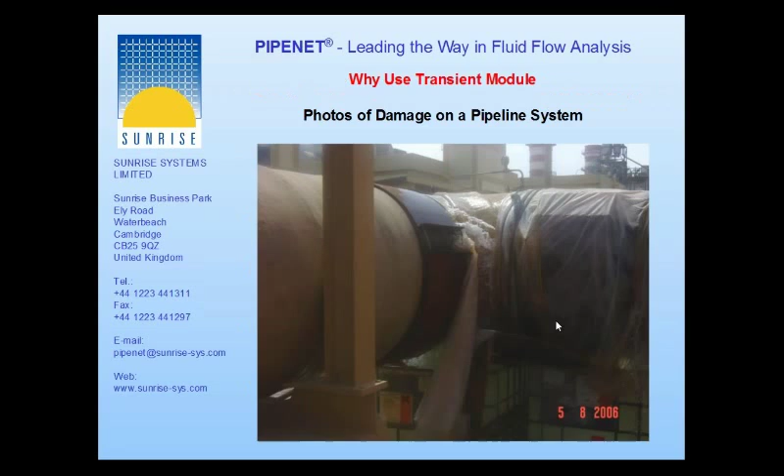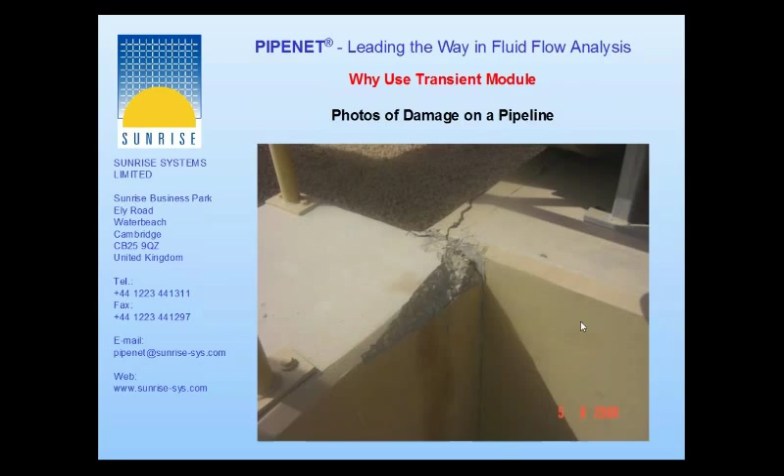I would like to show you the picture of damage on a pipeline system that is due to pressure surge. It is cracked because of the force from the hydraulic transients. PIPENET has 3 modules: standard, transient, and spray sprinkler module. The spray sprinkler module is for design of fire protection systems. In particular, it complies with NFPA rules and with some other rules as well, but the most important one is NFPA rules.

The transient module is used for dynamic analysis and it is for many kinds of applications. It is used, for example, for cooling water systems, loading and unloading systems, water injection systems, subsea and cross-country pipelines, steam hammer, and modeling control systems. All these applications are used for calculating the pressure surge. And as you know, for pipe stress analysis, PIPENET needs to calculate the hydraulic transient forces. Programs like Caesar II and ROHR2 can automatically read this kind of information from PIPENET. The other very important aspect of PIPENET is the ability to model the control system.

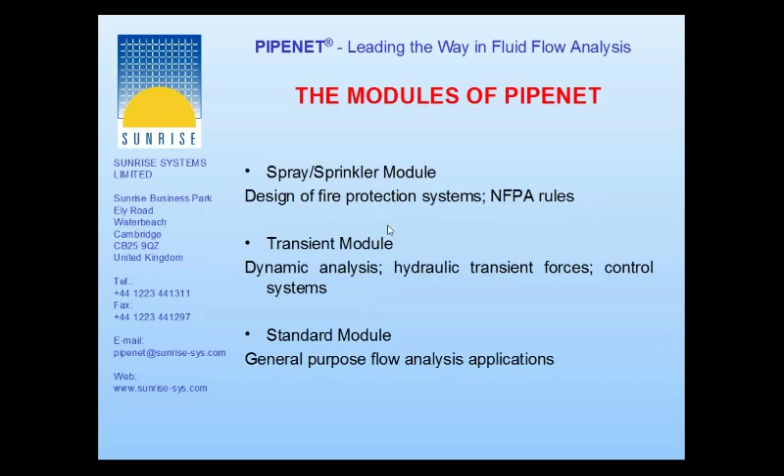The third module is called the standard module. It is for general purpose flow analysis applications. In the process industry, for example, it is used for modeling or designing cooling water systems, steam distribution systems, HVAC systems and such applications. The standard module and spray sprinkler module are steady-state programs, while the transient module is a dynamic program.

I would like to show you now one system. It is a very complicated fire protection system from the Middle East. You may know the oil company named Maersk. It is an oil company from Denmark, and this is their fire protection system in operation in the Middle East, in Qatar. You can see how complex that network is.

So this area here in PIPENET is called the drawing area. And this is called the properties window. This is called the overview. And there is also the fourth window called the data window. And you can switch off any of the windows, or maximize or minimize, and so on.

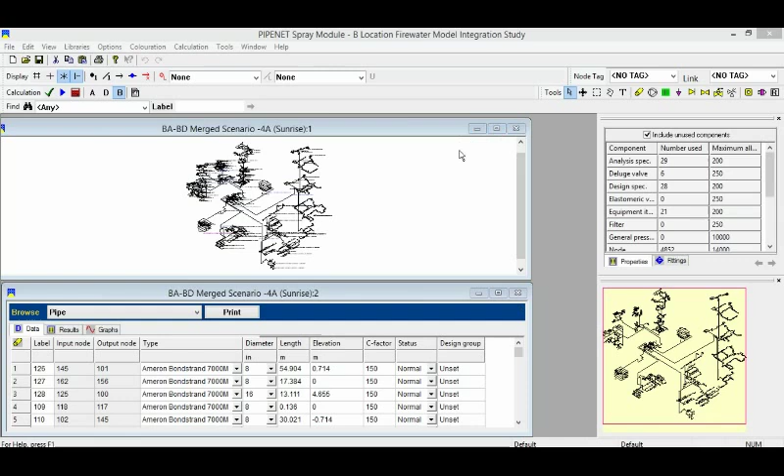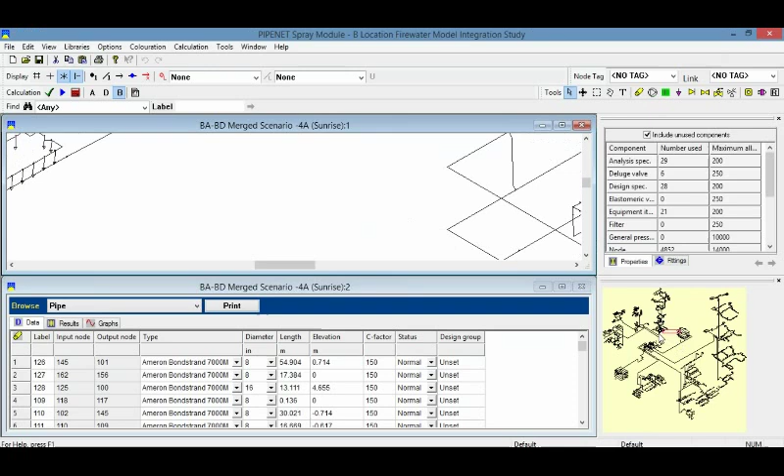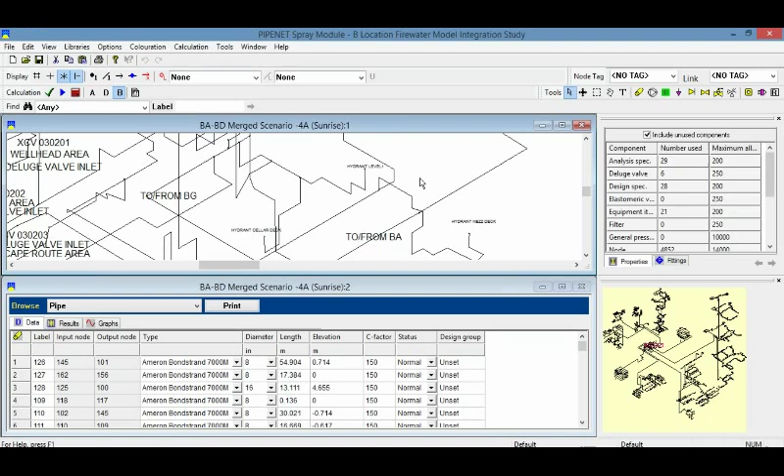And here on the overview window, you can see that there is a red box. Using this red box, you can move and navigate through the network. So what I am going to do now is click in the drawing area. If I click in the drawing area, it shows the number of components which I use.

So I can move, and if I click on any item, the item becomes red. And the attributes of these items are shown here. When I zoom in, you can see a little bit more. So we can do a calculation quickly for this. One click.

As you can see, it is a very complex system of 5,000 nodes and more than 3,000 pipes, so the calculation can take a little bit of time. But you can see that even though it is such a big system, a really big system, the calculation is done quickly.

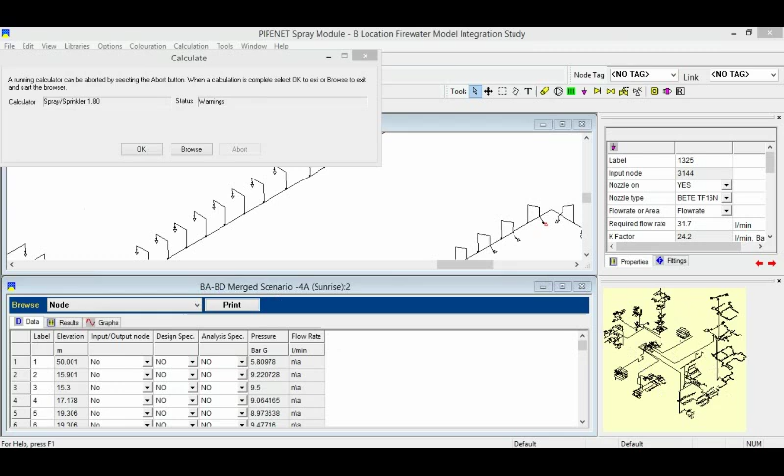So we can maximize this window, and you can see all the nodes and the pressure, and also the flow rates of the inputs and outputs in the system. So if I would like to find out where the maximum pressure is, click window, then horizontally, we have to click on this pressure, click again, and it will show the pressure in decreasing order. This pressure is the maximum pressure. It is about 15 bar maximum.

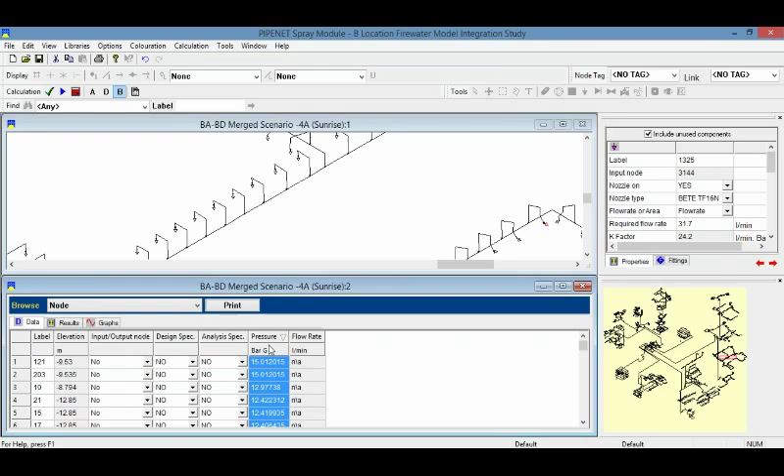I would like to find out where this pipe is. So click here, and it will take me straight to that node. This will save a lot of time because you do not have to search through all the network.

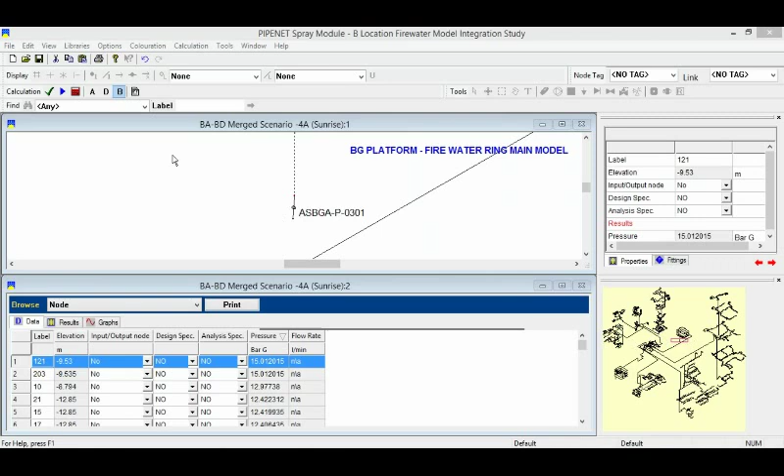So now we are going to see how we can input the network of the spray sprinkler module. I will click spray sprinkler. So I will create the user network of the spray sprinkler module. You can see the four windows, and everything is blank at the moment. I will go to options, then module options, and you can see that there are some combinations here.

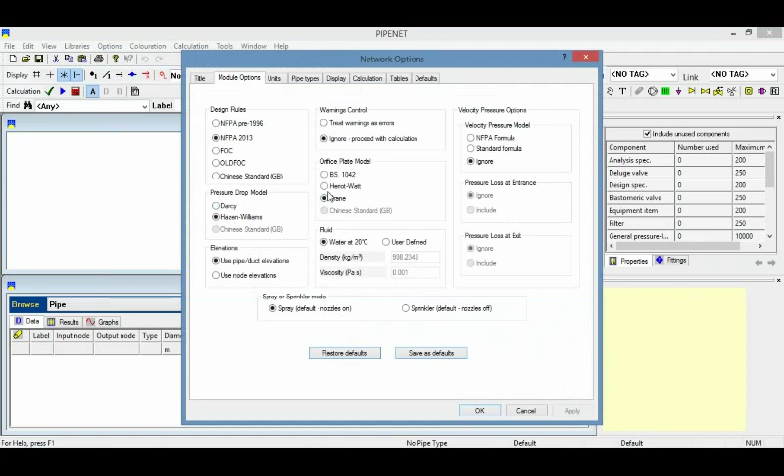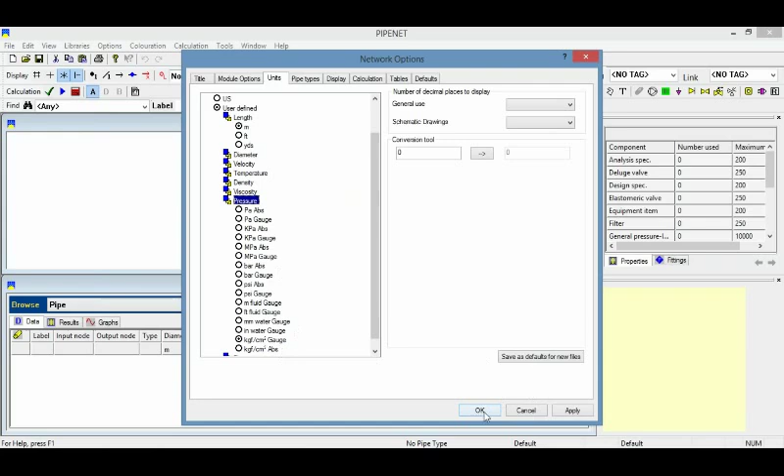I will go to the units, and you can see a range of units: lengths, meters, pressure, kilogram per centimeter square gauge. I will click OK. So now let's go to the options, then pipe types. But what we can do, we can go to the libraries and create a new pipe schedule.

I will click on new, and we can write the name, new, description, new schedule, and I can input the diameters.

34.56, 41.56, 75.58, 102.80, and you can see the nominal sizes. And this is the actual interior diameter of the pipe. Here is the roughness of the pipe, and we can give 0.0457. So apply. You can see here.

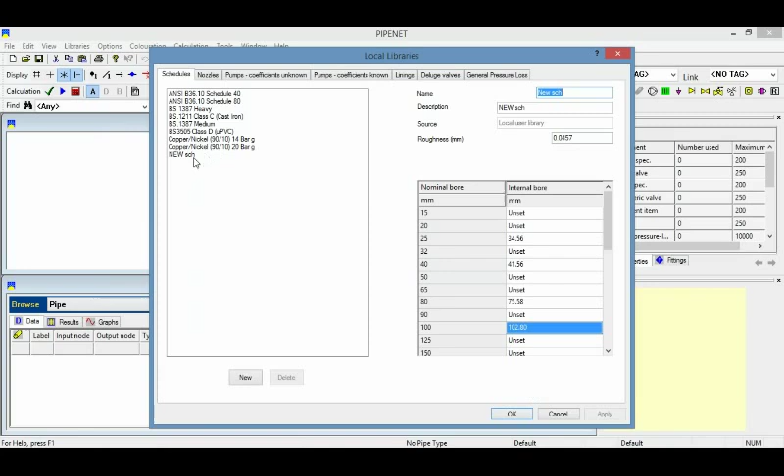So once we are here, we can input some nozzles. We will click on new. I just input the name of another nozzle. I will write HV45, and in the description, High vel K45. Then K factor 45, minimum 1, maximum 10. So a high velocity nozzle with a K factor of 45 and minimum and maximum pressure of 1 and 10 kilogram per centimeter square. I will click on apply.

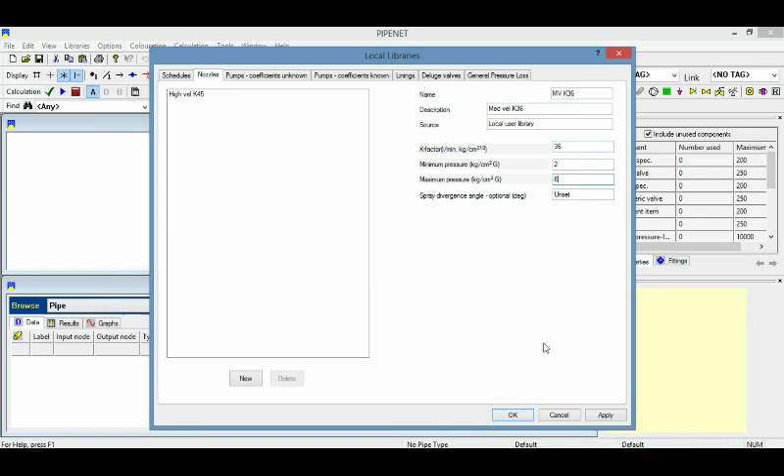And again new, because I wish to create another nozzle. So I will write MV-K36, description, Med vel K36, K factor 36, and the minimum 2 and maximum 8. So the minimum pressure is 2 bar and the maximum pressure 8 bar, or kilogram per centimeter square. It is almost the same as a bar, and the K factor is 36. So apply, OK. I will click on OK and finish.

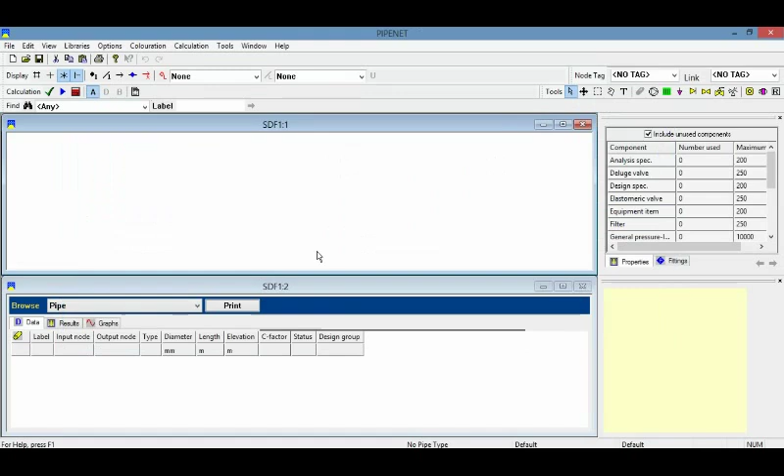So now I'm going to save the file. Click Save. And now we are going to maximize the window, the drawing area, and here we are going to click on options, pipe types, and I will click on new, and select the pipe schedule that I am going to use in this network. Please remember that in the library there are many pipe schedules, and I wish to use the one that I created already.

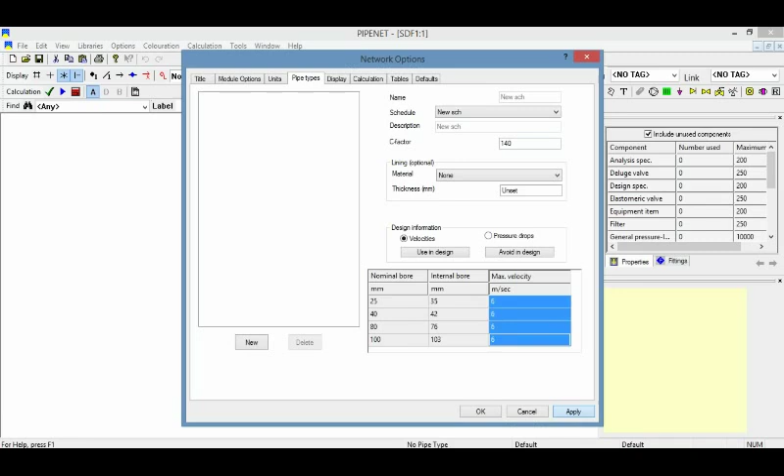So, as fire protection systems must be according to NFPA rules, we must use the Hazen-Williams equation, and for that we have to give a C factor. I will give a C factor of 140, and the maximum velocity I will give 6. I will click on apply, and it goes to the pipe schedule. I will click on OK, and now I can start to input the network.

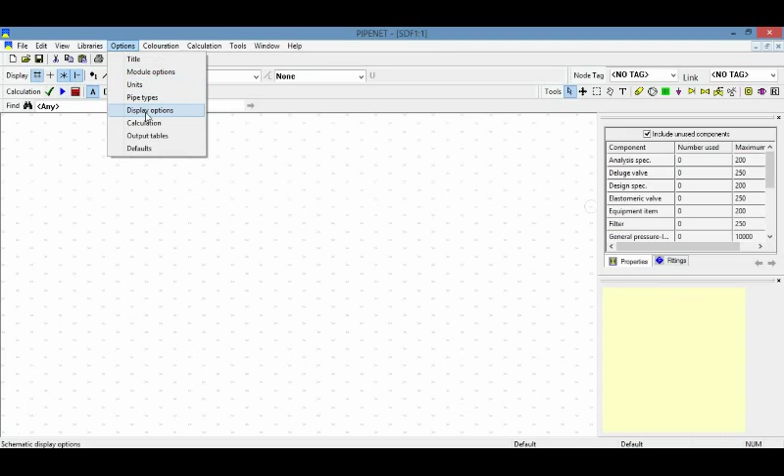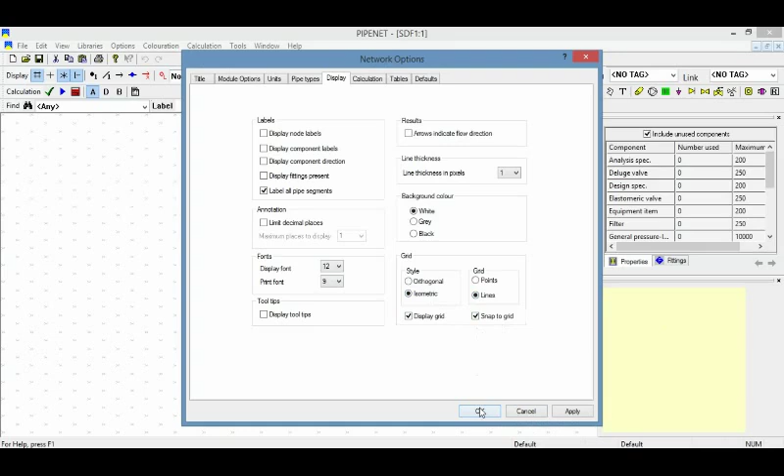For doing that, I will do the following. Click Options, Display option, Grid. Grid can be points or it could be lines, and you have to click on OK. So now you can have a different background.

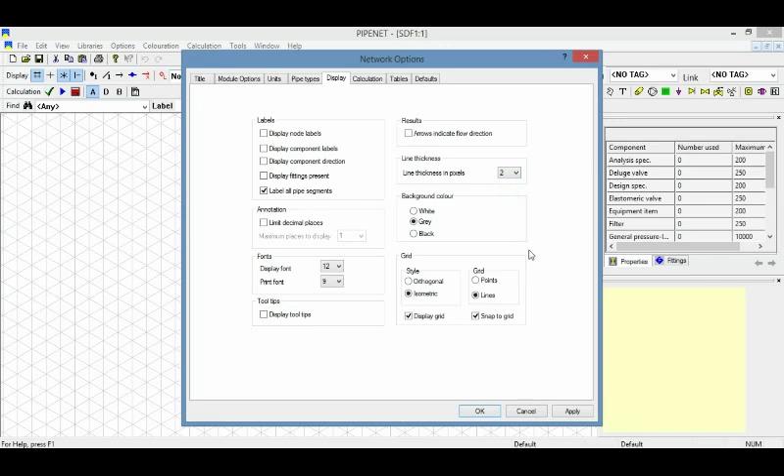I will click again Options, Display option. It is personal preference, whatever you prefer. I will give gray. And you can also change the line thickness, and I will give number 2. I will click OK. So now I am ready to input the network. I can put this here.

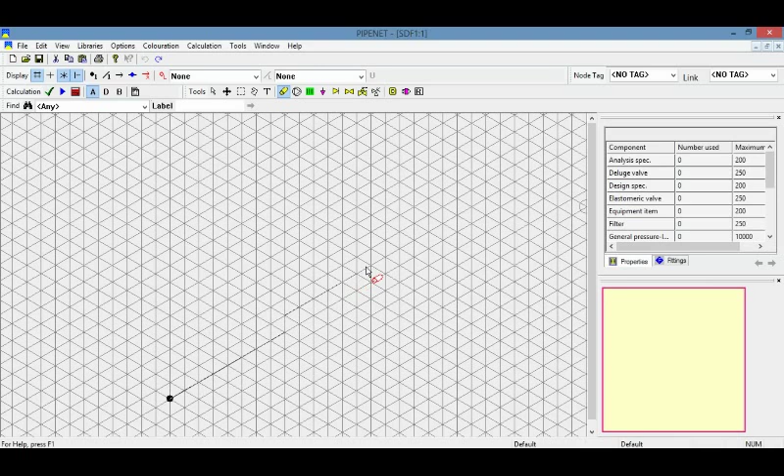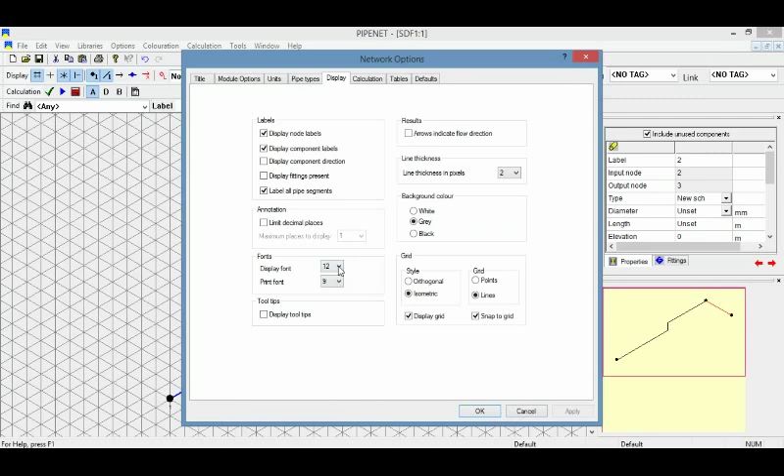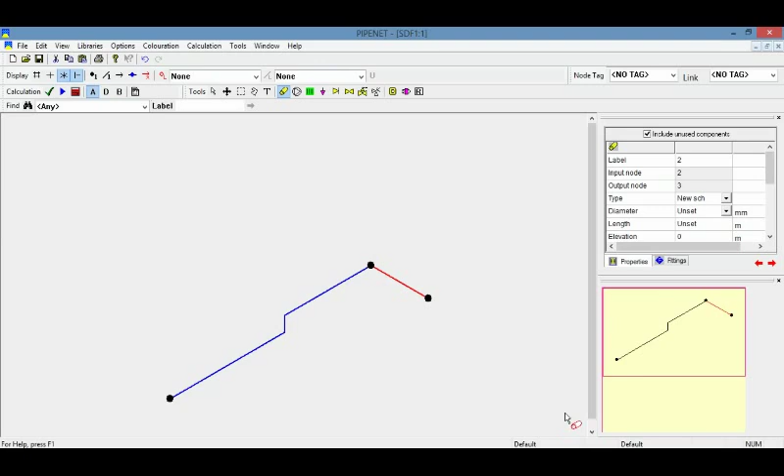And as well, at any time, you can also display the labels of the items. To change the font size, you can increase it. Click on Option, Display option, and you can give the font size, for example, 12. Okay. You can also switch off the grid so you can see the numbers more clearly. So we do not want to see labels now, and I will switch them off. And quickly I will draw the schematics. Click, click.

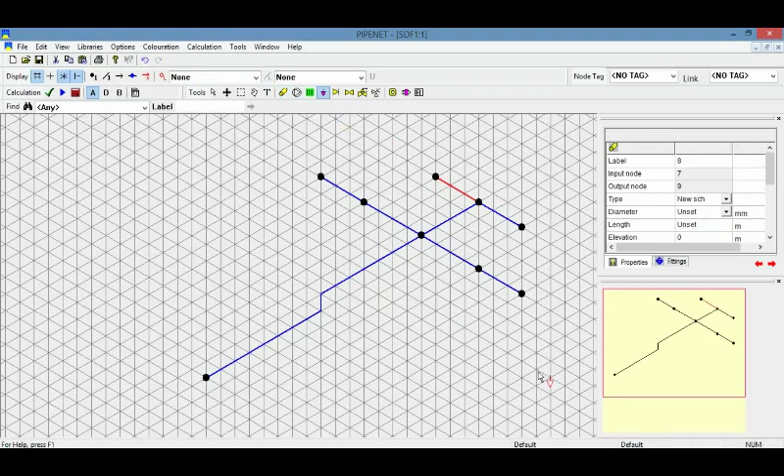Now I'm going to pick up the nozzles. Click. Click. As you can see, there is still blue and red color. The red means this property window is for that item, and blue means I have not input data, so I can select any item and it becomes red, and the others are blue.

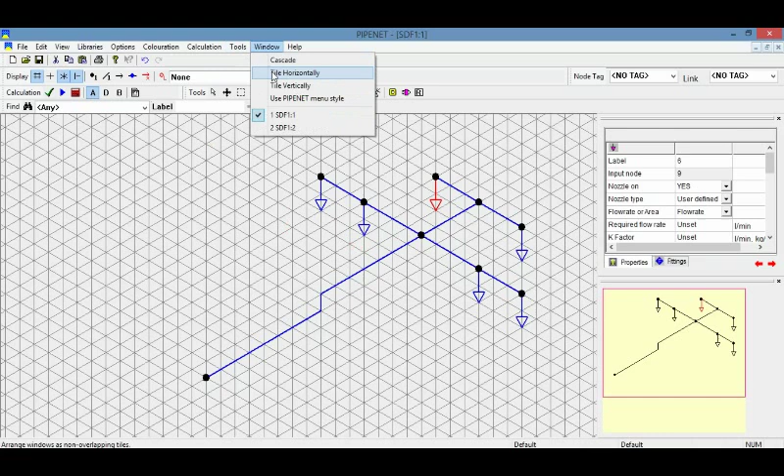I will click on the window. Now click on tile horizontally. Now scale to fit. And I will switch off the grid. And now if I click anywhere in the drawing, all items are blue because I did not input any data. I'm going to click on that.

Diameter. I'm going to give diameters of 25 to those pipes. And when I click on another cell, I click back. Paste in column. I'm going to have 25 in all cells.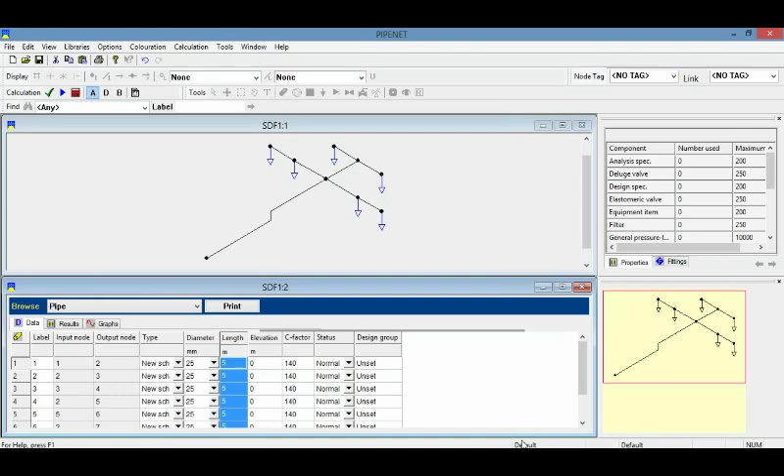So, of course, this pipe is different from the other pipes. I will click on the pipe, and I will make the length of the pipe 12 meters. And I will make an elevation of 2 meters.

2. It means that node number 2 is 2 meters higher than node number 1. If node number 2 was below number 1, then it would be minus 2. I will go back.

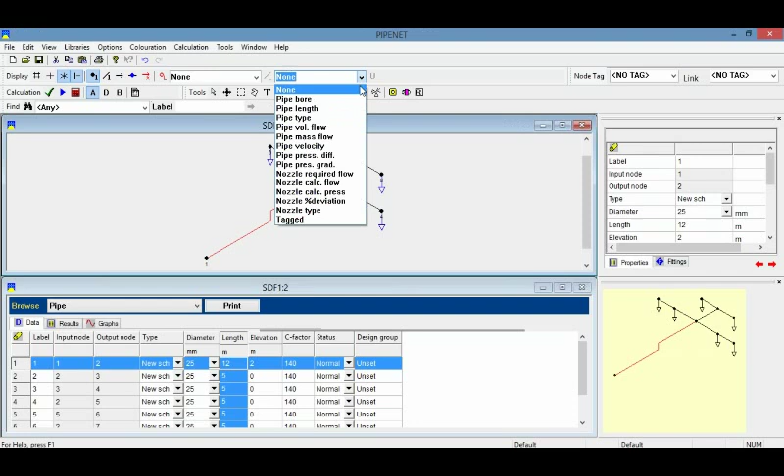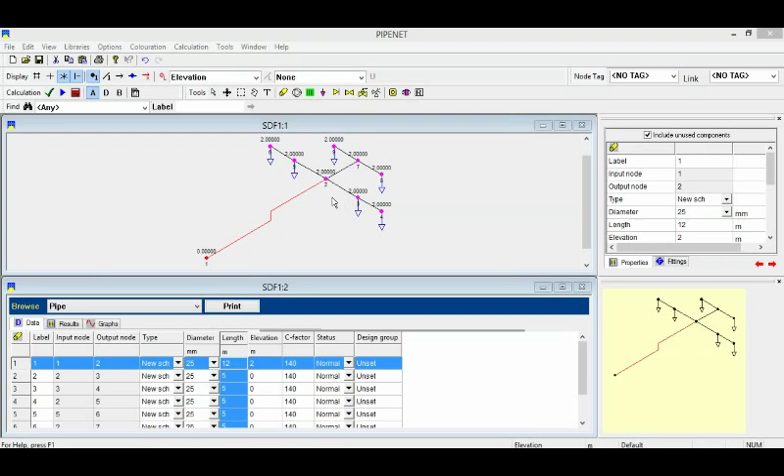We also can show the elevation. Click. Elevation. And it shows the elevation of the nodes. This node is 0, and because of this change, all the nodes have an elevation of 2 meters now. Okay, I can put none again.

I wish to input data for the nozzle now. So I will click on the data window, the nozzle type. I can find out, but I will choose a nozzle which I already input into the library, HV45. Then click on the next column, click back, right click and paste in column.

Then we wish to give a required flow rate. So for required flow rate, we can give 65 liters per minute. I will click here, back and paste in column. So you can see that all nozzles now became black. I can save it.

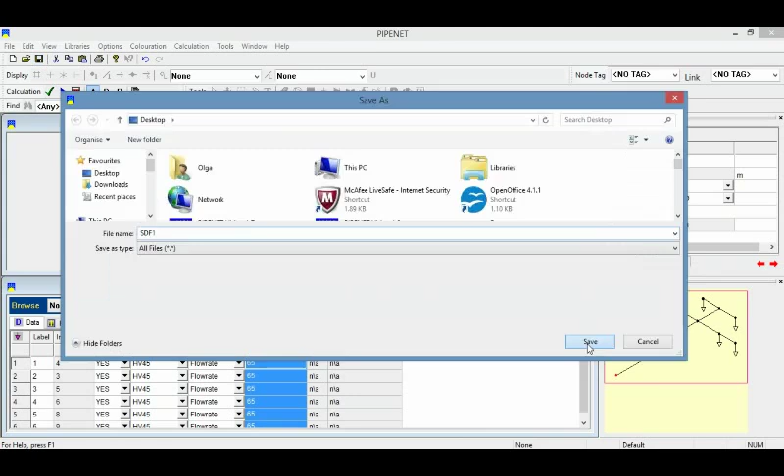I have to tell PIPENET that this is the input node, and this is all I am going to do now. I am not going to tell PIPENET anything else. I am just going to tell PIPENET that this is the input node. So this is an input node. I'm going to save it.

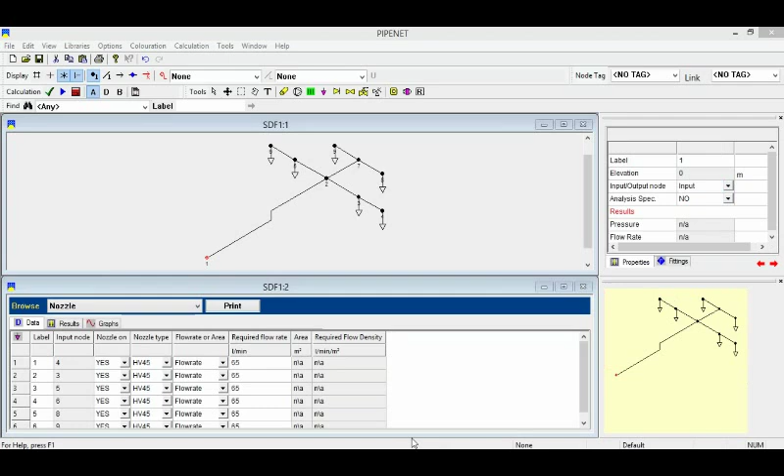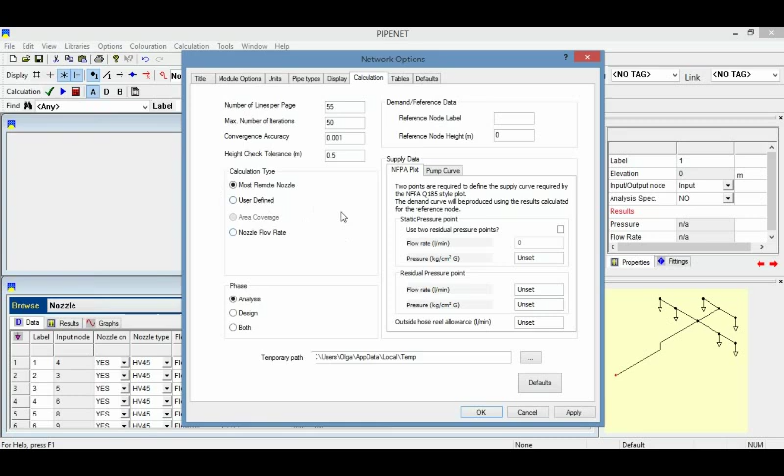And PIPENET can give you many different kinds of calculation. So I can go to calculation, specs for calculation. And the most common is the calculation type most remote nozzle. This one. This means that the last nozzle in the system will have exactly the required flow rate. I will click OK and save it.

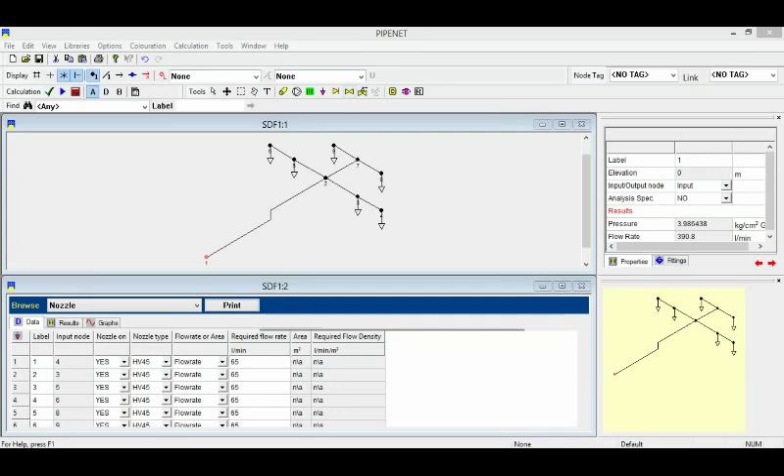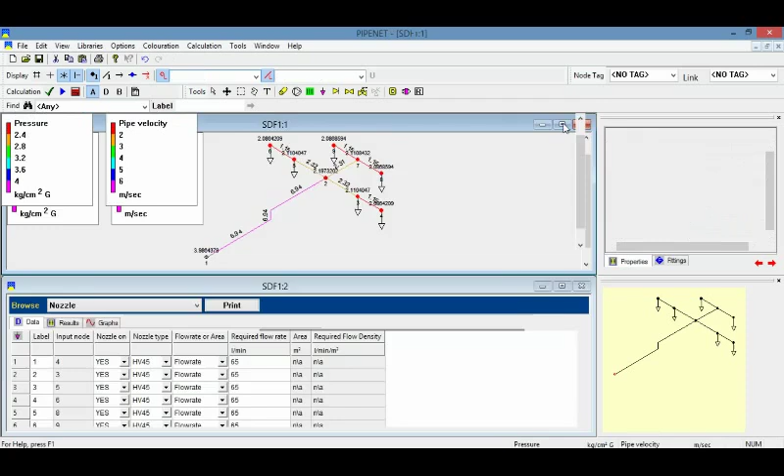Okay, and now I can do a calculation. Click on the calculation button. I can show the velocity. When I click on this, it will show what the different colors mean. I can show the pressure as well. I can maximize the main window. You can see more clearly.

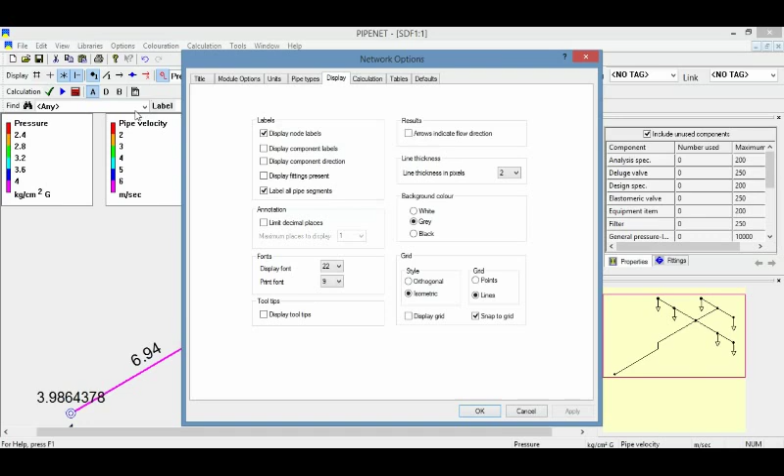I can reduce the font size now. I will click on options, display options, network options, and font size. Okay. So the drawing now is easier to read. I can switch off the coloration.

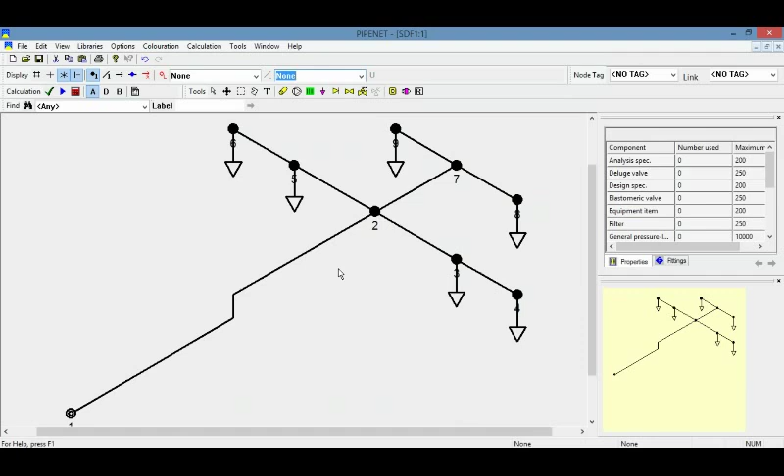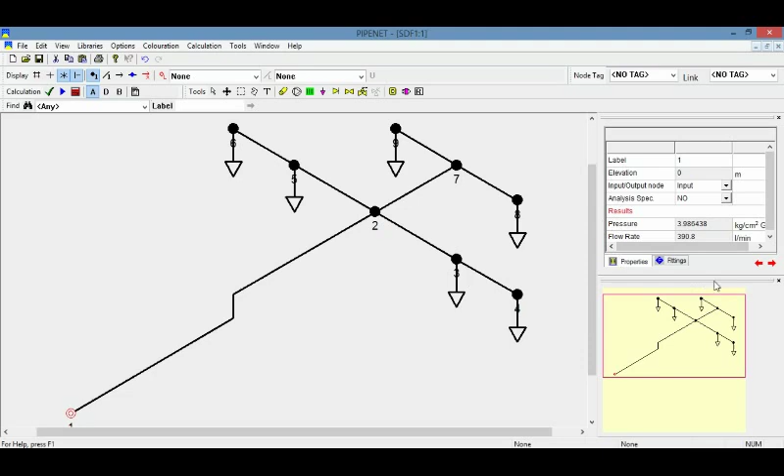So I will click on any item, and this property window will correspond with that item which is in red color. If I click on the first node, the node becomes red, and this is an attribute of the node. So you can see the pressure. I will click on the window, tile horizontally, scale to fit.

So this is a very quick demonstration of the ability which PIPENET has in design of fire protection systems.